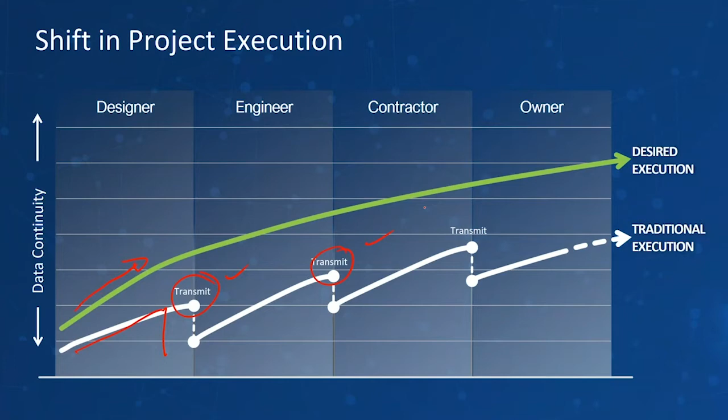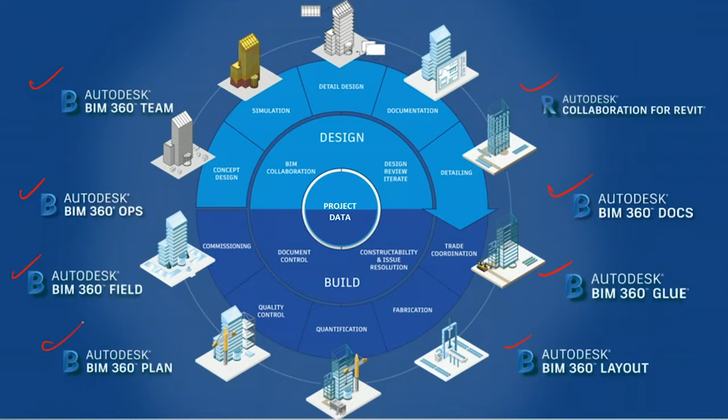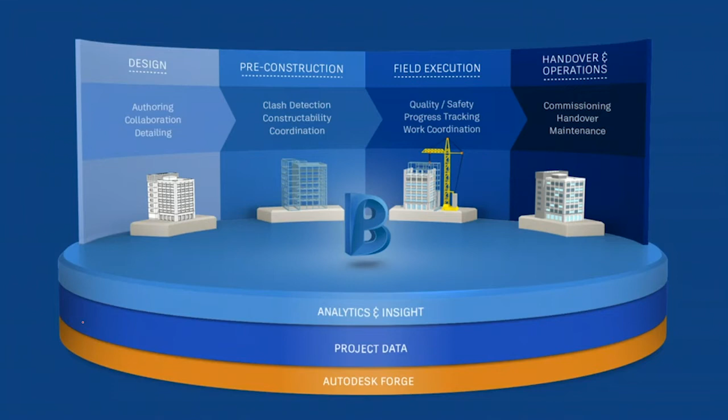And we used to try to explain this to you guys, and it's a little bit confusing to say the least, even to look at this graphic. Let's put that away. This is what we're talking about since April 9th of this year. We're talking about a single common data platform where the project data resides.

So Forge is like the Lego kit and the programming interface for our developers. And so we design BIM 360 from Forge. They also design the products that they build on Forge, and it kind of all comes together.

So think of BIM 360 as an iPhone, and we have some basic apps for BIM 360. We have apps that cover design, pre-construction, field execution, handover, and operations. If you find that there's something missing in BIM 360 that we don't make today...

Take a look at our app partners. We have over 55 different apps built on BIM 360 today that fill some gaps until we either build them ourselves or they get integrated somehow throughout the value chain from Autodesk. So within this platform of BIM 360, we have our design data, and we're going to really talk about design today in BIM 360 design.

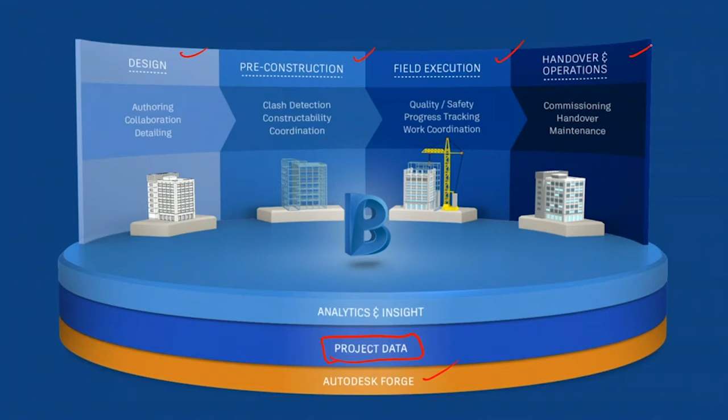So let's get you smart for one minute on what this means to you. BIM 360 is the platform. We have BIM 360 design. We have BIM 360 glue. We have BIM 360 build.

At the core of all three products is a fourth product called Docs. So from a design standpoint, here's what you'll learn today: if you use Revit and you want to push Revit central files to the cloud and collaborate with teams on that central file, you'll say I need Design. That Design license will include your Docs license as well.

The same thing with Glue. If you want to do clash detection in the cloud, you'll say, hey, I want to get Glue because I want to do that clash detection thing.

Now the Build piece is actually really impressive, because overall what Build gives you are project management or construction management tools. So that's when somebody says, I don't do Revit, but I want to do markup, I want to do coordination as far as viewing drawings and comparing one model versus another, or one drawing versus another through drawing sheet comparison, and I want to do some issue tracking, punch list tracking, quality assurance and quality control checklists. That's Build, and you'll have your Docs license along with that too.

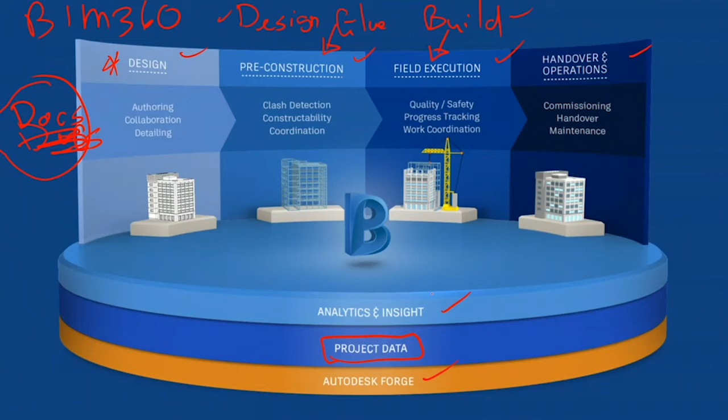So that is your crash course in BIM 360 and these modules. So let's really dig into Design.

It wouldn't be an Autodesk presentation if we hadn't changed names on you for products. So, BIM 360 Design—let's get you smart with this. This used to equal C4R, Collaboration for Revit. So that's what it's named today.

So if you say, hey Microsol, hey Dan, I want to buy some C4R, Dan's going to quote you BIM 360 Design. But BIM 360 Design will contain your legacy ability to do C4R stuff, as well as the new functionality built into BIM 360 Design.

But the premise has not changed. First of all, you need to be using—might sound silly—but you need to be using Revit to do the C4R thing within BIM 360 Design. So it starts with Revit. The model gets pushed to the cloud.

The change within BIM 360 Design is that it's going to push your model up to the Docs, BIM 360 Docs backbone. Overall, that's where the central file will reside. Now, in the past, your C4R used to go to the BIM 360 Team site.

That's one thing you really should know: don't mix up those projects. If you've got C4R right now, finish your C4R projects, finish your BIM 360 Team projects—that's fine. But if you get any new projects, put them on BIM 360 Design, use the spot that goes to Docs.

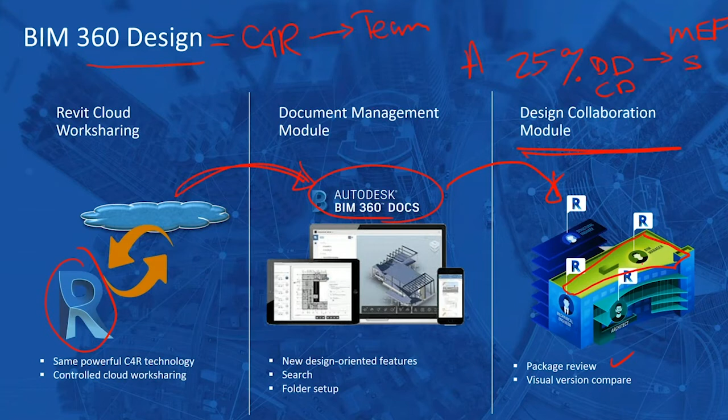I'm going to show that live. Essentially, this is what it looks like. Revit gets pushed into the cloud. You're putting these central files in the cloud. They'll automatically version and automatically date stamp. And you notice you've got Mr. Vandelay that's working there.

But essentially the part that is brand new, maybe long awaited for those using this technology a year or so ago in collaboration for Revit, is the permissioning. So I've got Cosentini, Le Mesurier, Stantec. Each of these team folders is permission based. The moral of the story is we have really locked down permissions across design teams.

And you work out of your own design team folder. When a new package is released—for example, when architecture shares something with Cosentini, and Cosentini says architecture changed their floor plates, we need to adjust our engineering plans—when we accept their package or progress set, you can see Cosentini has a consumed folder, which means they're going to consume the architectural model as their background for Revit. This is a great permission. We call this a very low trust environment now for the delivery of your project cycles.

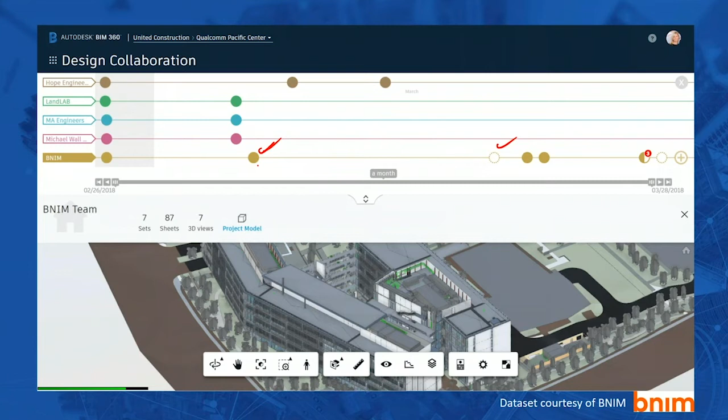Or in lay terms, a progress set. So as I made a progress set back here, this circle is filled in right here because my progress set was reviewed by somebody else as an engineer up here, and they consumed it—it's part of their backgrounds for Revit. This progress set, which is empty, has possibly been reviewed, but it hasn't been adopted or consumed, so it's really not part of anybody's background.

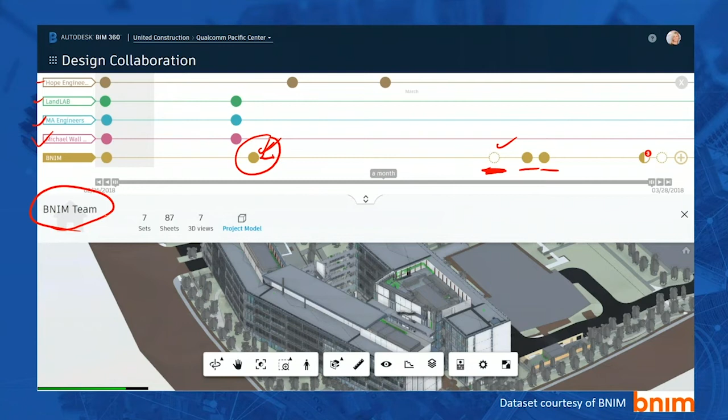But you can see my following architectural packages have been created and consumed. So as a teammate—for example, BNIM—when I make a new progress set or package, I'm going to use this plus sign, and it creates a new package. Then somebody, for example this landscaping group, LandLAB, whenever they go ahead and take a look at that package, they have a choice of whether they want to consume it or not.

Some of the tools that we all get as part of design collaboration is this exploration tool. This was born about a year and a half ago—it was in our other product called BIM 360 Team. It's made its way inside of this design collaboration tool.

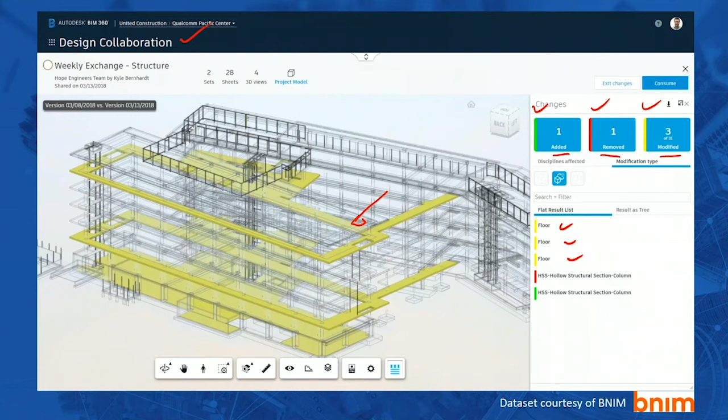In nice colors of green, red, and yellow, we get to see things that have been added, removed, or modified. And because this is Revit, you get to see if it's a modification based on property type. It could be a physical modification—for example, the floor plates physically changed in size—or it could have been just a property changing, going from generic slab 6-inch to, say, hollow core slabs, so it's a property change and not a physical change.

So these are actually buttons. Every time you click on them, you can turn on and turn off the colors for clarity and representation.

This piece right here is really just to highlight your 9 button. We've gotten away from calling it a hamburger menu, but whatever that 9 button is called, it lets you see which modules you are subscribed to.

So in this case, if you were saying, hey, I want to buy some BIM 360 design from Microsol, what you will get and see as a user will be these 2 modules: document management, which is docs, that's the backbone. Everybody gets to see docs, and you'll see design collaboration. You'll also be able to see the insight module as well.

If you were just the project manager and you're saying, I want to do redline, I want to do markup, and I want to do some document issue tracking, then you will only see docs. You will only need to buy docs.

If you were somebody who goes on site as a project manager or as a CM person, and you said, I want to do the things you talked about inside of build, issue tracking, quality control checklists, and things like that, then you will see this and this — model coordination. So as project management and construction management, you will also have access to docs as a backbone as well.

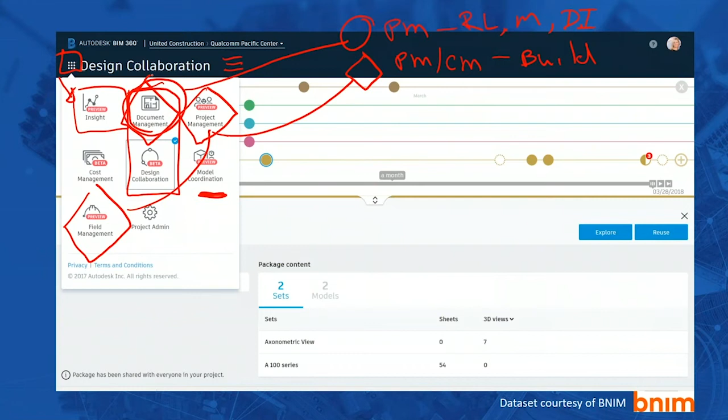Okay, so if that's not confusing enough, let's hold it to the questions right at the end, and we'll get to those clarities. The last piece, and this really is the component that takes everything and pulls it together, is called the desktop connector.

BIM 360 desktop connector, in lay terms, is a virtual drive. So just like you have your C drive, and then your M and L drive, which are your network drives, desktop connector really is your virtual drive for your project.

So within document management, I'm going to show you these features. We're going to see how document management manages PDF files as well, not just native Revit files. Document management lets you take side-by-side comparisons in colors of red and blue, showing what your drawings have changed, whether it's PDF, Revit, or DWG.

That's huge. Let's get rid of the silos of products that you guys are buying and put you all on BIM 360, because this pretty much does everything that your silo products do today.

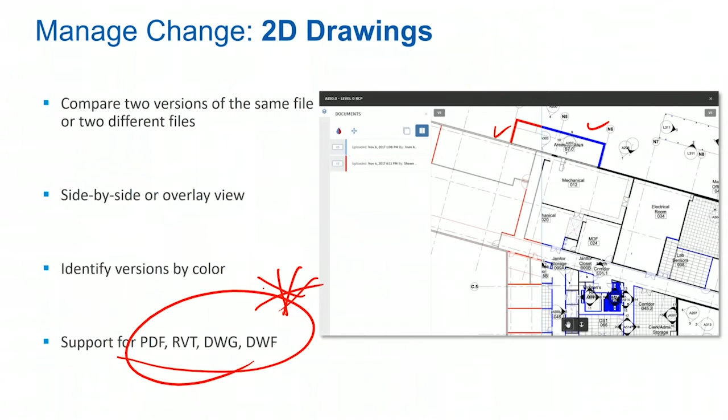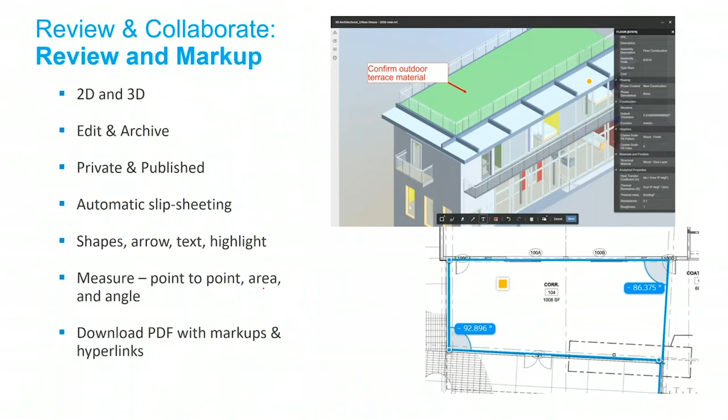Markup in model space, do some measuring, point to point, area and angle takeoffs. And then also create some workflows.

Hey, I want to create an issue management, as far as a document management issue. I want to talk about this skylight right here, and I want to assign it to a person, so put at Caesar, and it'll flag me, and I'll get an email to say, hey Caesar, you need to take a look at the issue dealing with the documentation on that skylight, right?

So this is document issue management. The build component — if you were managing the construction site and you said, hey, they never flashed this skylight properly, that's a punch list item, then you would actually buy build.

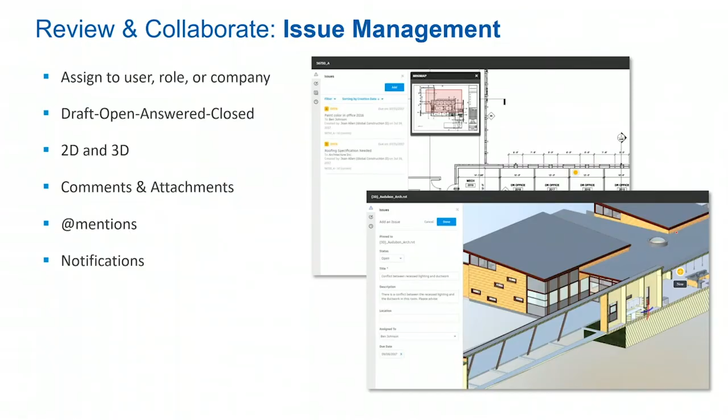Okay, so just for the video purposes, I'm showing these slides. I'm not going to go through this today at all, but this is part of build, doing field management workflows, quality control workflow issues. So this is quality controls.

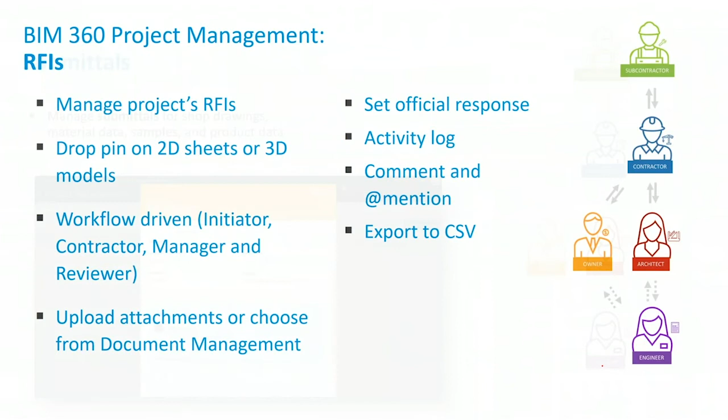And we also track things like RFIs. They follow a workflow, going from one person down to the consumer here. As well as submittals — this is all built into the BIM 360 build module.

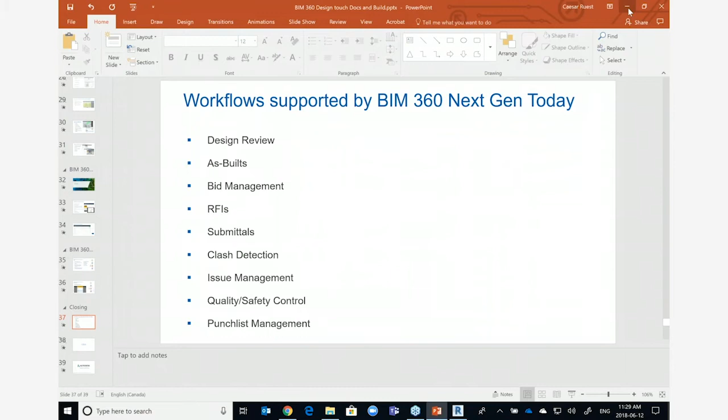So I'm not going to bore you with the Revit front end, but I'll tell you, when you're going to do BIM 360 design and you want to take that central file and put it in the cloud, it starts with Revit. Your Revit files need to be pushed from Revit to the cloud. So you can see this file has a little cloud moniker right there, and it tells me the path.

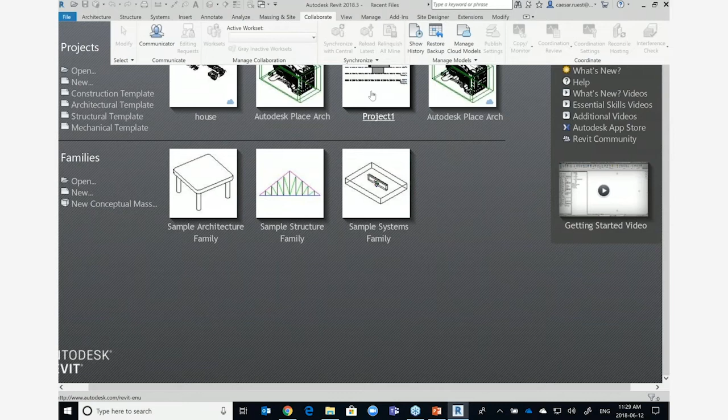This path for this project here is on my computer, so this does not live in the cloud. The moral of the story, the workflow, is start your files in Revit. Once your file is open, you would click on the Collaborate tab. For example, let's just use this simple file. I'm not going to go through this entire process, but I want to show you this is where it starts.

If you've seen collaboration for Revit, it's exactly the same, nothing has changed here. So this file is local to my hard drive. When I say collaborate, I know it's local to my hard drive because this button shows up. After you push this button, this is where the magic starts.

You want to send this to BIM 360 document management. I'm running 2018.3, which allows me as a user to push this model to my old BIM 360 team site or my new BIM 360 docs site. If you're using 2019, you'll only see this bottom one. But some current customers want to see both because they may have to work in both environments - not at the same time, but maybe one project on team and a separate project on docs. Once you push this button, that's when it goes to the cloud.

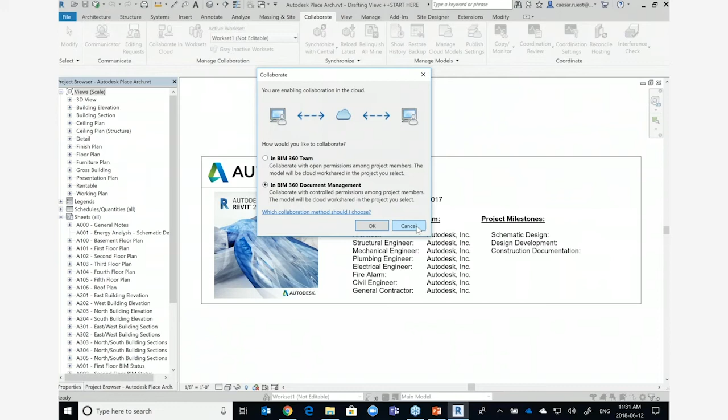That's the first step. The second step is learning the publish settings, because what you see in the cloud depends on what you're publishing from Revit. For example, I've got a 75% CD set called this. If I look at this set, I can say no, I don't want to send all those views to the cloud - I want to send the model to the cloud, but only send certain views, like this 3D view and any sheets that are currently checked. I just want to send these sheets to the cloud. That'll be part of my 75% CD check.

So your knowledge on Publish, if you've never done it before, you'll become quite intimate and knowledgeable about it, and you will save that out. Because this publishing mechanism makes things land in the cloud exactly as you want to see them.

So here we are - let's fast forward a little bit, and we've pushed the Revit file to BIM 360. I wanted to start here first to show you a project that's partially done, to give you an idea of what your project could look like if you're working whole hog, all in BIM 360 - no longer using siloed products out there for PDF or project management stuff. You can do everything here.

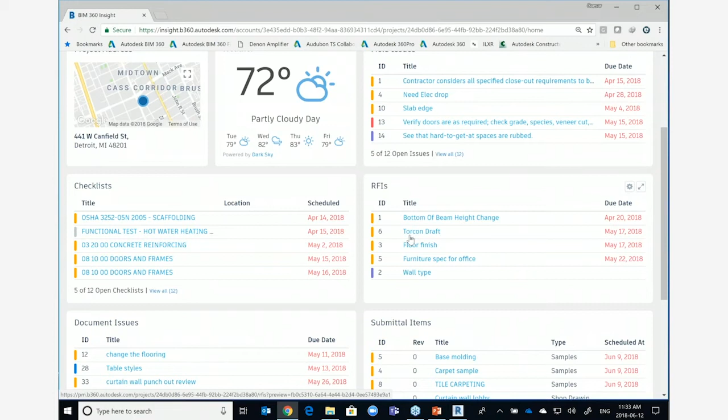So what document issues do we have today? Oh, okay, we need to change the flooring. We need to change some of the table styles. What are the due dates? We were tracking some submittals inside of the project - what's going on there? And the design packages: Saginaw Structure just updated a project a little while ago, and Anarchy Architecture sent something to the web on May 23rd.

These are all hot links. For example, if we want to see an issue that's currently answered, or open one that's not quite answered, we can just click on any of these dashboard links and jump right to it - change the floor. So here's the details of issue number 12, assigned to no one. That's fine, we've got a small design team of 2 or 3 people, so you don't have to look far within the office to tell somebody to do it. But if you had multiple offices, you would assign it to a specific person. It's attached to a plan, and we can take a look at that plan right through here to get a better sense of what this issue is all about.

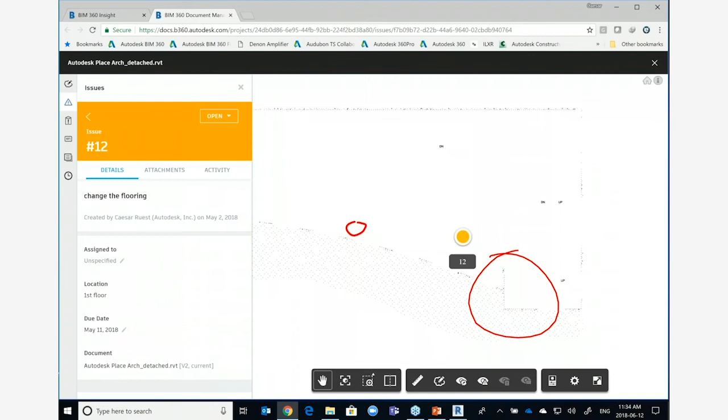Change the flooring - that's pretty cryptic, Caesar, I don't get what you're saying. So it's going to go to the plan, find where the issue is, circle it and identify it for me right there. Issue number 12, change the flooring - oh okay, it's in the restroom. Somebody probably put carpeting down in the restroom. We should probably put that down as linoleum or terrazzo or something like that.

So within the issue, you can track things like attachments - if you had pictures of what the flooring needs to be, you can add and drag and drop them here. You want to see the history of this issue, or you want to add comments.

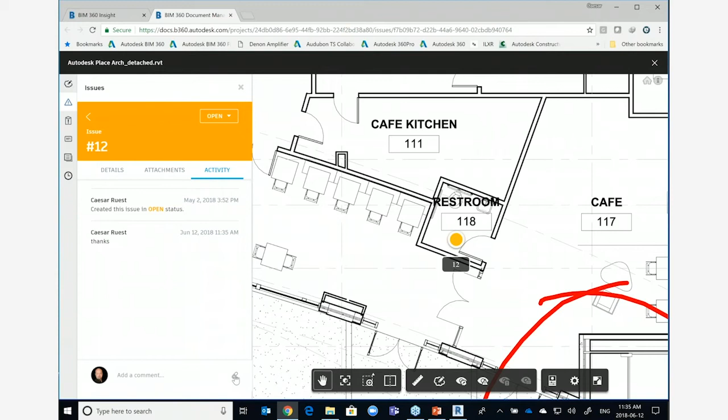You can also attach issues and photographs. Take pictures with your camera from your phone or tablet and append them to this issue. Once it's done, you can say answered, or just jump right in and close it. Right, this is terrazzo.

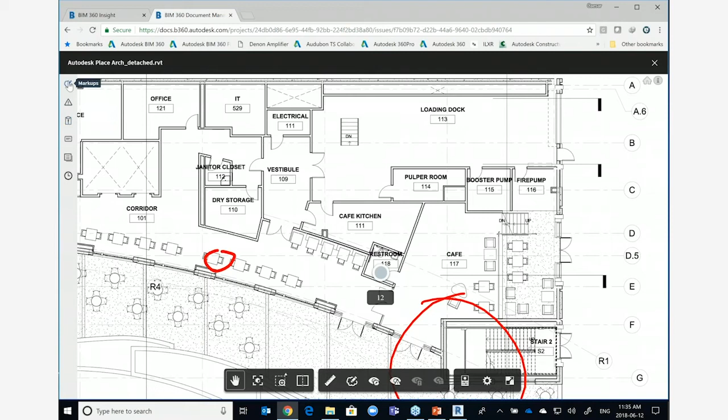So that's some basic issue tracking. I might as well stay in this spot right here because you can see, yes, there are markups. So there's some markups, you have a markup legend. When you click the markup button, it shows you the legends of markups.

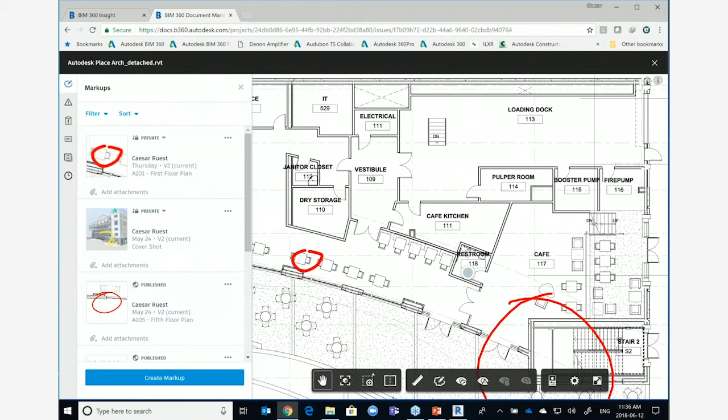Pretty basic stuff, I don't want to waste your time on this because creating a markup launches the tools. You get the tools, you draw the markup. One thing to note is you can have markups which are private, which is nice because I don't want to share all of my mistakes with my colleagues. I want to fix them first. So you have private markups, and then published markups, which is really a colleague-to-colleague sharing mechanism.

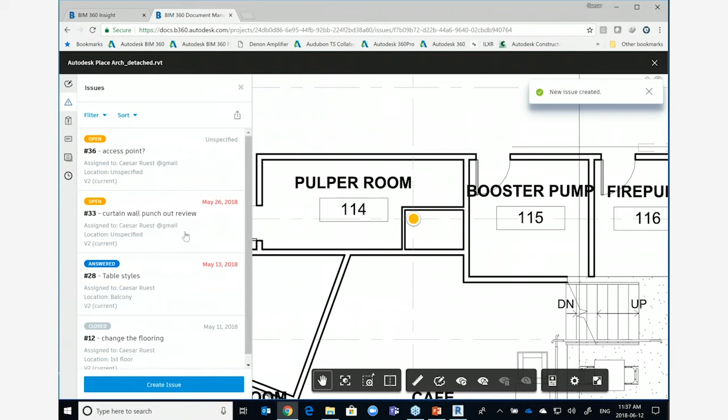To which you really have to come to resolution on an answer to that problem. The issue tracking, that little dot there is simply create an issue. You would zoom into the pulper room, let's stick the issue right there. And the issue could be: access point. This is where you assign it to a user. So down here, that's how you start assigning issues to a user, create that issue. It auto-numbers itself and places it there as a push pin. All is golden.

Digging further, you can do field issues. This is if you have build, you can do these field issues like punch list items. If you have RFIs as part of build, your subs can do RFIs. If you wanted to see the sheets, you come to the sheets and 3D views.

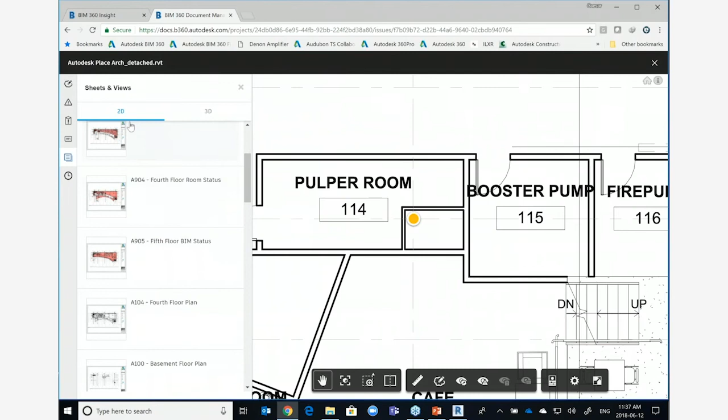Remember I said that published feature way back in Revit? Well, this is showing me all of the things that got published. So I've got my colorized floor plans, my sheets, and my 3D models. So only those things that I said to be published are published. There's my elevator core because I intended for people to see this.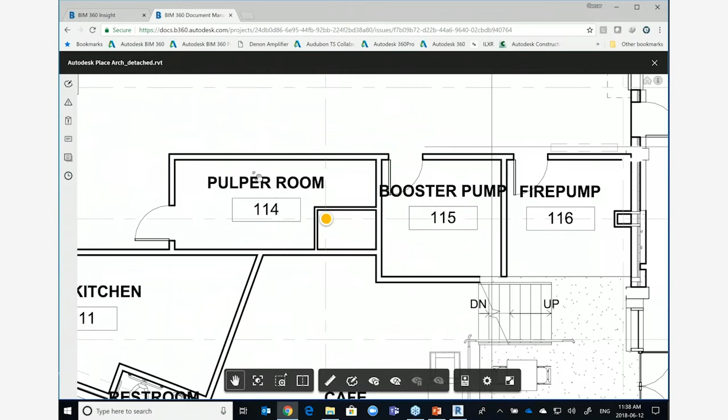And then the history: version control, and even side-by-side version control, as well as split view. Split view is a very powerful kind of document management system. Within the split view, you really get a chance to select things. See what I did there? I selected a plan view item, and it's showing me that respective item in my 3D view.

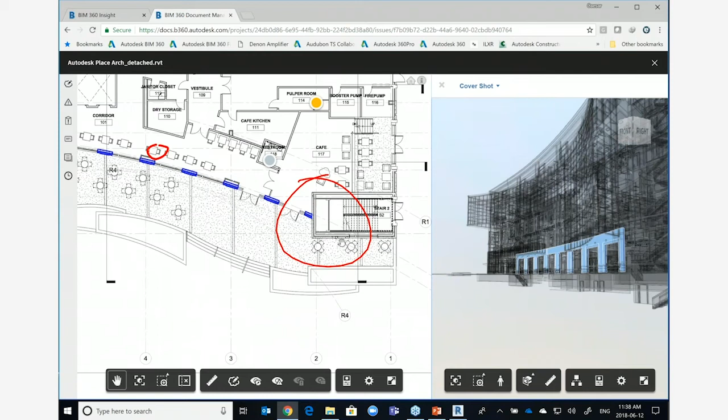This is awesome. So if you've got anybody you're trying to have design discussions with, you can go ahead and choose any item in your plan view, or even in your model view, and have it respectively show you that item down in your plan.

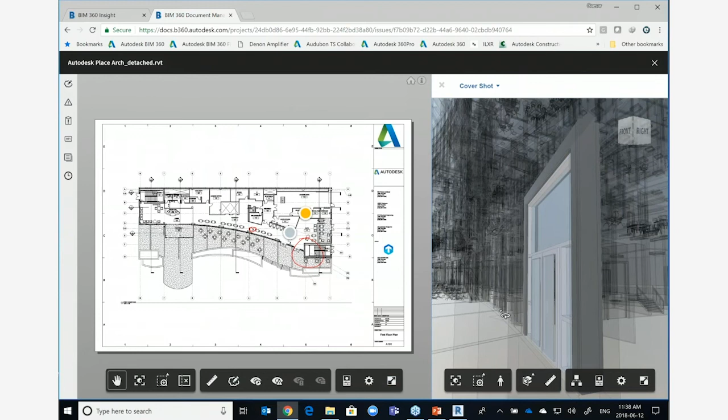So there's the door. Show me the other door right here. I'm going to choose something further down. Show me this top piece right here.

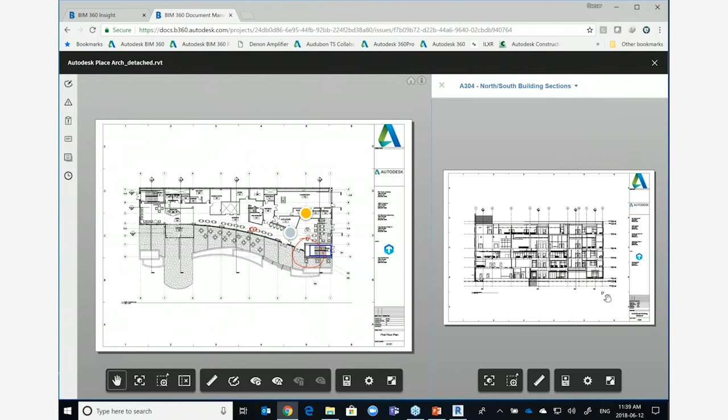So great view, but you can do more than that. You can stick it onto—and that's my technical term—a different sheet. So show me the south elevations of the building. And now from an elevation view to a plan view, you can do the same kind of thing. If you've got the right sheet—I've accidentally grabbed the wrong sheet, I think. Oh no, there we go. So there's that window in plan view.

Okay, very cool view, this is part of document management tools. So this is your lowest common denominator. Let's fast forward and get to the heart of it: design collaboration. What were those swim lanes? Caesar didn't talk about that during that whole document management piece.

Here we go. So when we push it to the cloud, we're doing a few things. We're going to push it to our own discrete folder, and that's what we're in right now. We are in our folder for Anarchy Architecture, and only us as the architecture group can see into our folder.

And here's those swim lanes. So this drop-down arrow, when you click it once, it just shows you what our folder is doing and what the shared folder is doing as well. You can also see there's a timeline: there's May and there's April, and a month showing me. As I decrease this timeline, it starts to expand the weeks, and as we expand, we start to see more published sets way down here on a daily basis.

We can see Mid-City Mechanical that was published way back on this timeline on the 16th day of April, as Anarchy Architecture. This is part of the swim lane function, and you can expand the swim lane to show all the teams as well.

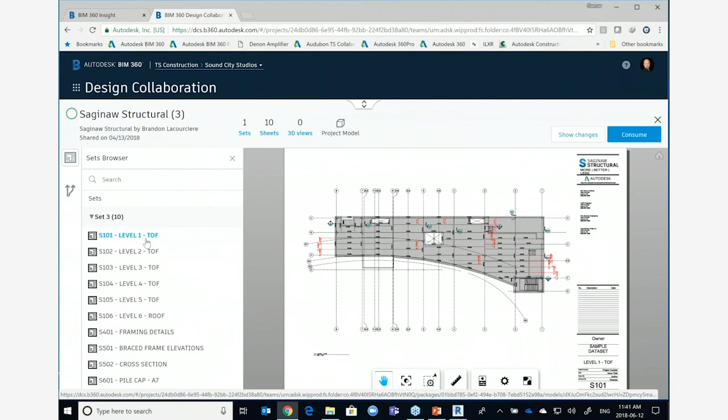I can explore. This is their published sheets. Remember that published feature? They published these sheet views for us to consume or to explore.

Now to show the changes, let's use the change visualizer. It's going to load the previous version and compare it to the current version. If there were any changes on this sheet, it would show them in colors. In this case, it's finding 6 changes.

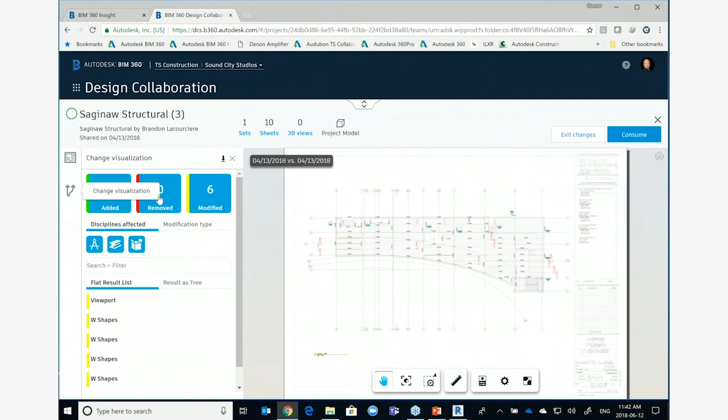Now as a tip, usually what I recommend, because I know modeling, I'd like to just jump into the model and run this comparison tool, the change visualizer, right in the model. So let's do that.

Now you can start to really get a better picture of what the building looks like. So in our building, you can see the yellow items here, they have been modified. And like I said, these are buttons, so if you turn that button off, it hides the color and gets rid of the distractions.

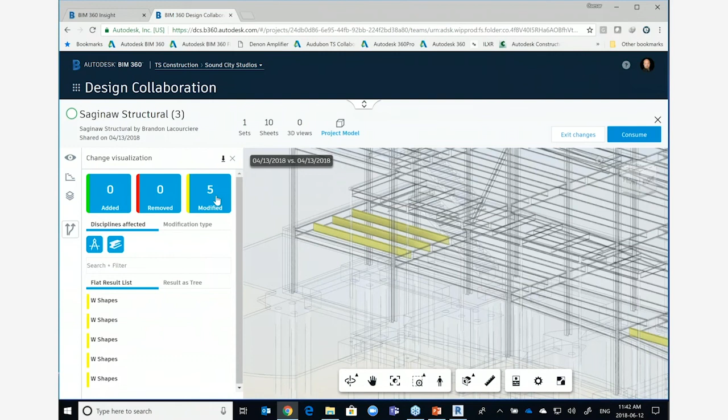And if you click on the W shapes, it will zoom and go to that shape. You see how it went to that one shape there? You can also scroll through the shapes right here to say, show me that shape, show me that shape, show me that shape.

And in addition to this, there's also the date to which this changed. So this shape changed in blue is the earliest date. What was the latest date? And you can say, oh, did you see that? So watch this, as I click this, see the shape, the steel shape got deeper.

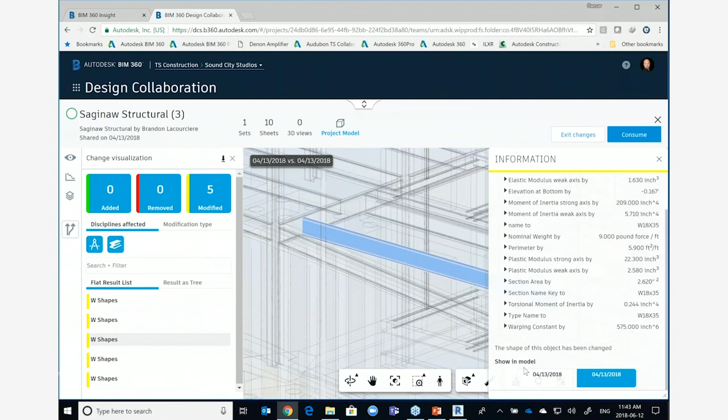It's also going to tell you right here what the components are as well. Because of my screen size, I'm limited to sharing this at 1024 by 768, but on a bigger screen you'd be able to see all the context here. So this is very, very useful.

And the same thing here. What did this one look like? Oh yeah, this one got deeper. I'm going to take a look, yeah, all these shapes really did get deeper.

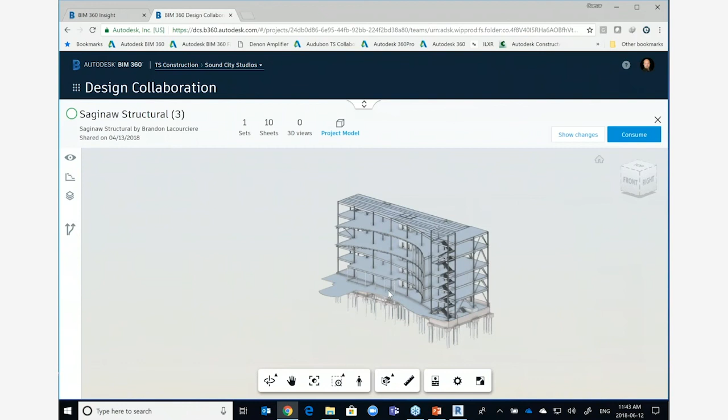Now this is your choice. You can look at this model and continue to explore these design changes, or use this great feature right here. These are 3 new features built into this compared to collaboration for Revit.

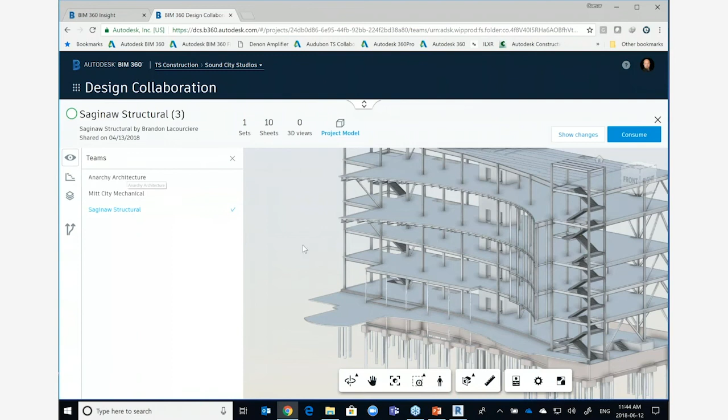I want to see the phase of construction, so these are under new construction. Okay, cool. I want to see the teams, so show me architecture overlaid with this. And it's going to skin it with architecture.

This is not to do the clash detection, that's part of glue or model coordination. This is for you as the architecture project manager to skin it and then possibly take a look at each discrete level.

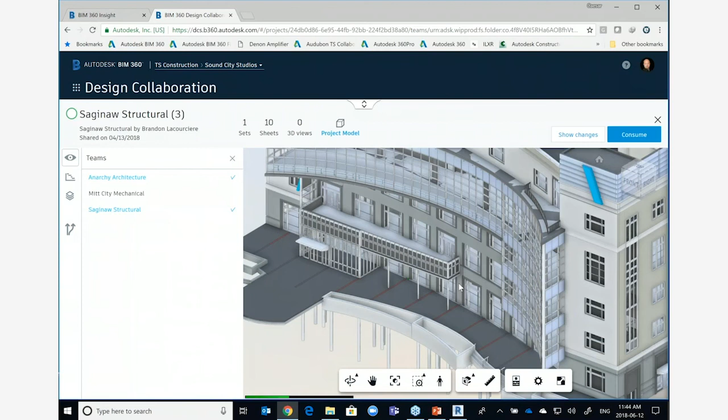So remember those changes that were down on the first level? You can say show me first level, and it just shows you first level. That is so, like, to me, I don't care about the value of this, this is just cool to me to be able to jump back and forth to these levels.

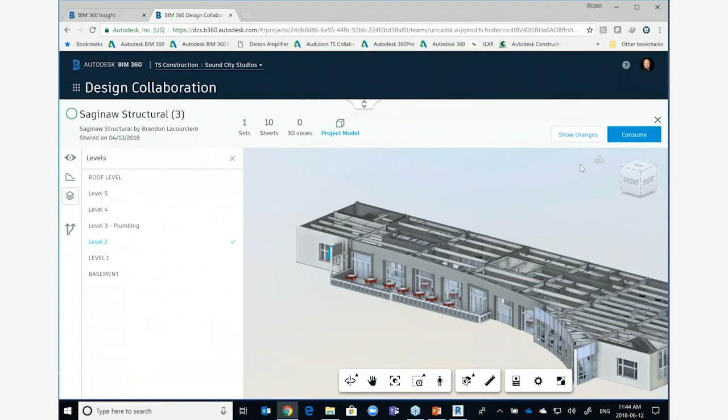It's almost like the Minority Report movie with Tom Cruise. So anyways, great visualization tool.

And now, remember that circle is empty? If I say consume, this will change that circle and consume it as part of Anarchy Architecture. See how it changed it? That is telling you that Anarchy Architecture, which is in bold here, has now consumed that latest structural model change.

It does 2 things by doing that, okay? The first thing is you've accepted that package set by consuming it. So you've accepted the progress set by consuming it.

And this is where Caesar puts his technical hat on, okay? So Caesar, the geek here, puts his tech hat on and shows you that within your document management folders under Anarchy Architecture, BIM 360 Docs built a consumed folder for you. And under that consumed folder is exactly where you'll see Saginaw Structural.

And this is exactly where you'll see this version. You can see it's updating it right now. We consumed it, so it is updating the version of this Revit file. It'll be done there in a second.

And while it's working on that, way back in Revit, if you had a link from structural, this link right here, actually, there it is. If this was linked to the cloud, and that's the whole moral of the story here, this link will also update for you automatically. I never finished this example at the beginning of my presentation today.

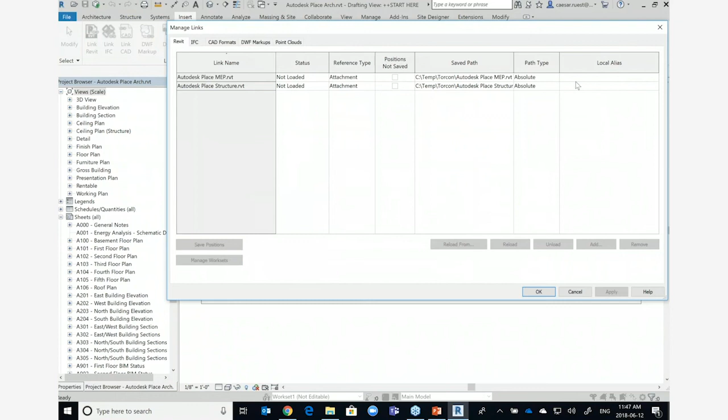Because I never finished this, this file doesn't exist in the cloud. But if I was to open up another cloud file, that cloud file, along with this path, would actually say cloud. Instead of saying absolute, it would say path type cloud, because of this workflow. It will update my Revit file now, that linked Revit file, because this would be the cloud Revit file to which I linked. I hope that's as clear as very viscous mud, is the way that I can think of it.

And we also have a mechanical file here too. You can see under Anarchy Architecture, we have this Mitt City Mechanical, and we are on version 4 because we have consumed a variety of the mechanical models over and over, which means our Revit file is on the most current Mitt City Mechanical model that we want.

Those are very specific words that we want. So what I describe in this workflow, just to bring it home for you, this workflow is meant for those firms that want to create progress sets on maybe a bi-weekly basis, so every twice a week. We want to allow our consultants to work off of progress sets, right? So that's not quite real time. That's twice a week that you have old data.

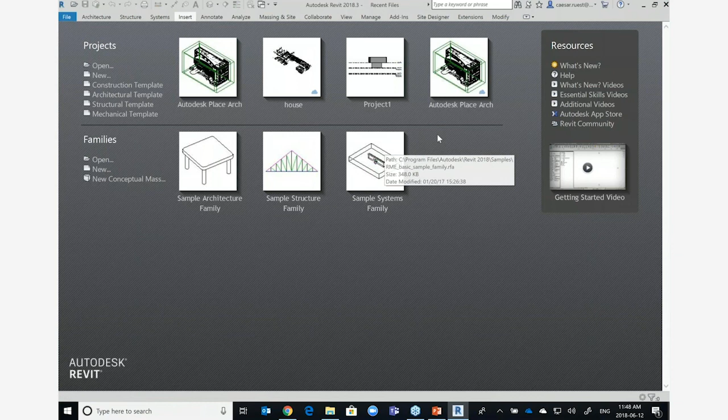If you wanted real time, like near real time data, as Anarchy Architecture, let me show you Desktop Connector. Let me close this off. Let me show you Desktop Connector. Let's open up this file. So it's opening a cloud model.

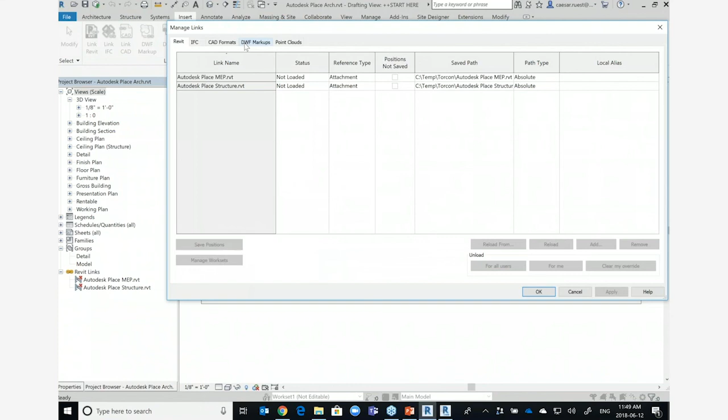So manage links. What we're going to do is create a cloud link. So let's go into our plans view. Okay, so let's say that we wanted to bring in a Revit link as a background. This is where we're going to access Revit link. So I am about to talk about Desktop Connector.

So what I really like to show here is, it gets confusing. You'll see a BIM 360 icon up here when you are doing File, Open, or File, New. When you do those two commands, you'll see a big B up here. But when you're not doing it, you're doing File Link, you really should browse to My Computer. There's your Desktop Connector right here. This has to be a separate installation. You double click it, and this is your virtual drive.

There's the little snowflake. You will see one of these, typically just one. You will go into it. This is your account. It used to be called a hub. Like BIM 360 team used to call them hubs. They're called accounts now, that's just to keep you guys on your toes a little bit. ZZ development, or as I like to say, ZZ development. Project files.

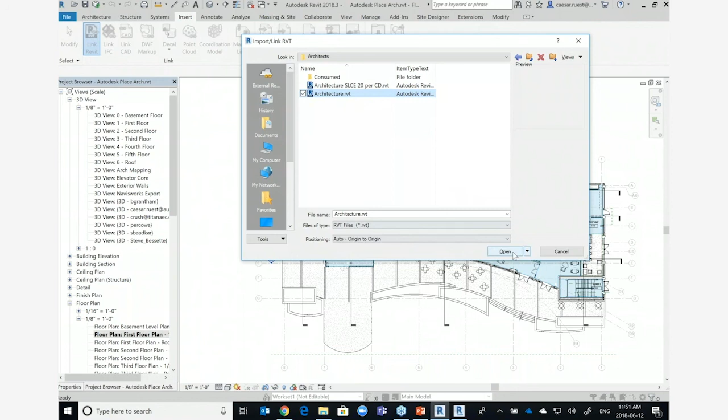And remember what I was saying, I want near real-time file linking. This is where I'm going to browse into my architect's file folder. And I am not going to go into the consumed folder. I am literally going to choose their central file, and I'm going to link that into this project.

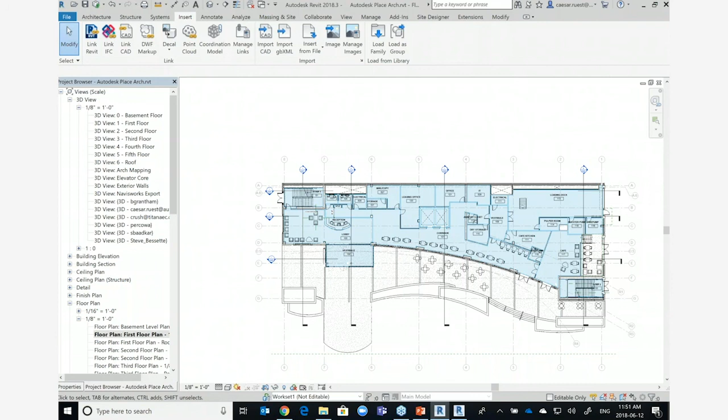This will get you to near real-time linking, so that if you get a call from the architects, and you're the structural engineer, and as a structural engineer, I say, hey, you architects, did you guys update your file? And they go, yeah, we did. All you have to do is refresh your Manage Links, and that's exactly what will happen. Your link will refresh. And the nice thing about the refresh link is that it'll only send the delta changes. It's not going to send the 100 megabyte file over again. It'll be the delta changes that get saved and refreshed to your Revit experience.

And now that I did that cloud link, you can see it, right? The path type is cloud. So anytime I save this file out in the future, any other person, when they open it, as long as they've got access to this project, they will be able to access this link, and you won't have orphaned links.